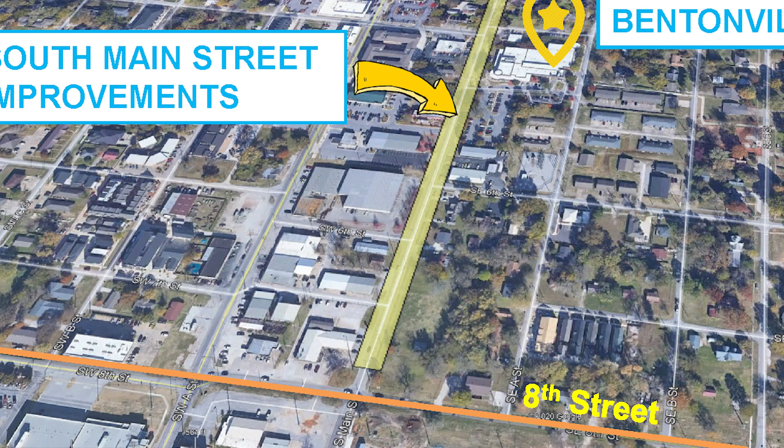The City of Bentonville proposes to make improvements to South Main Street. It's essentially a streetscape type improvement, approximately half a mile, between 2nd Street to the north and 8th Street to the south. 2nd Street, where we end, is just about a block south of Bentonville Square, and we'll be doing improvements within that intersection. As we approach 8th Street at the south end, the shaded area stops slightly short, because 8th Street is proposed to be widened on a future separate project, and that connection will be made with that project.

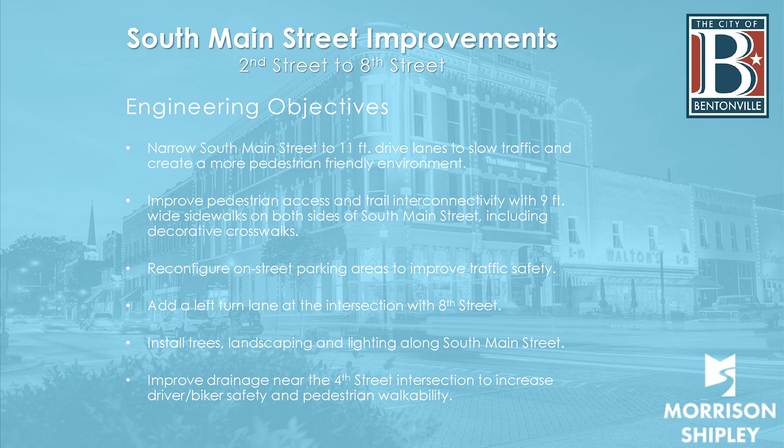As with any project, the city has objectives and goals, including narrowing South Main Street to 11-foot drive lanes to slow traffic and create a more pedestrian-friendly environment. Today the drive lanes are approximately 14 feet wide, and by reducing that, we're hopeful it will impact driver behavior so they naturally slow down and better accommodate pedestrian traffic.

Another goal is to improve pedestrian access and trail interconnectivity by adding 9-foot wide sidewalks on both sides of South Main Street, including decorative crosswalks. We will also reconfigure on-street parking areas to improve traffic safety, and add a left turn lane at the intersection with 8th Street. As I said, we're improving South Main Street but will not go all the way to 8th - that turn lane will occur for the most part on the 8th Street project in the future.

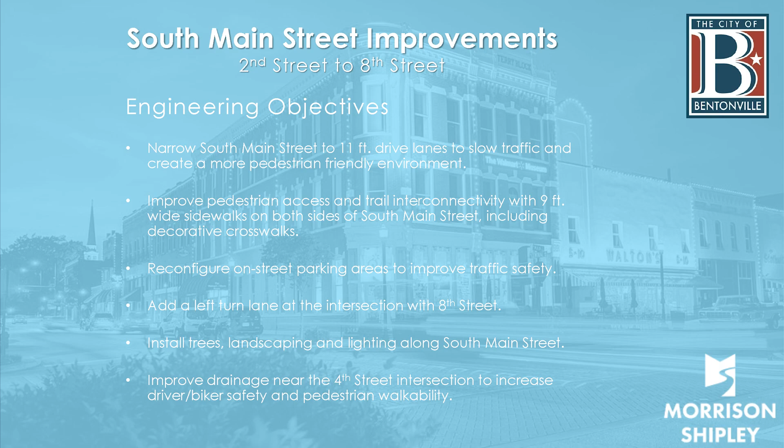We will also be installing trees, landscaping, and lighting along both sides of Main Street. And we'll be improving some drainage issues currently near the intersection with 4th Street, to increase driver safety and bike and pedestrian safety.

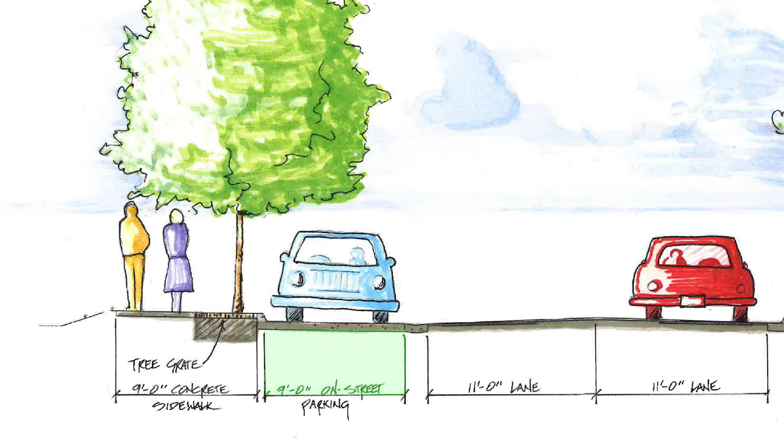Here we have a typical street section proposed for South Main Street. We're proposing 11-foot drive lanes and 9-foot on-street parking, which will be periodic and intermittent on both sides of the street for the length of the project. Also, 9-foot concrete sidewalks on both sides, and we'll be lining the street on both sides with trees and lamp poles.

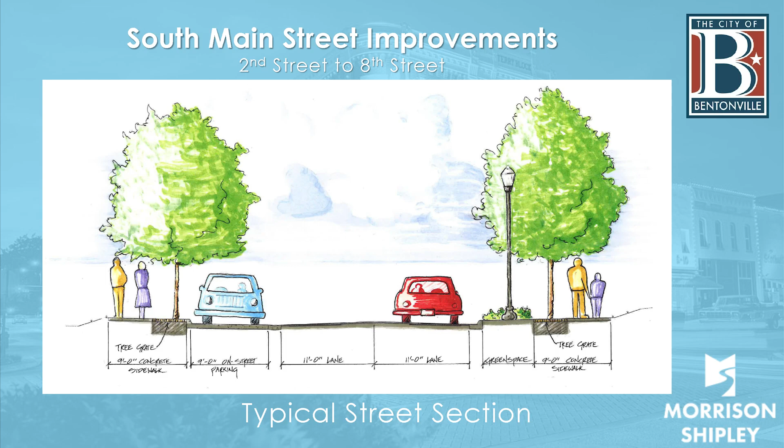Here we have a typical plan view, or overhead view. South Main Street is a 2-lane street, and we'll be replacing the curb and gutter all the way. In some places we have on-street parking where you can see cars parked on either side. We will have a 9-foot sidewalk on both sides, and decorative crosswalks, as you can see here.

In this condition right here, that's actually an existing Bentonville trail, which we'll be accommodating. There will also be trees on both sides of the street, lining both sides.

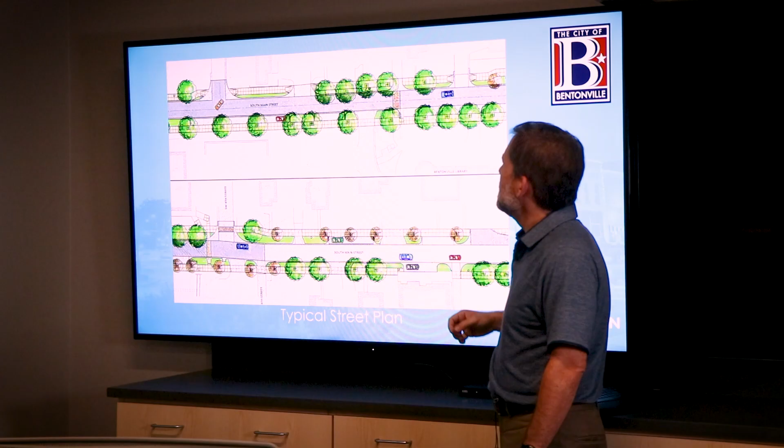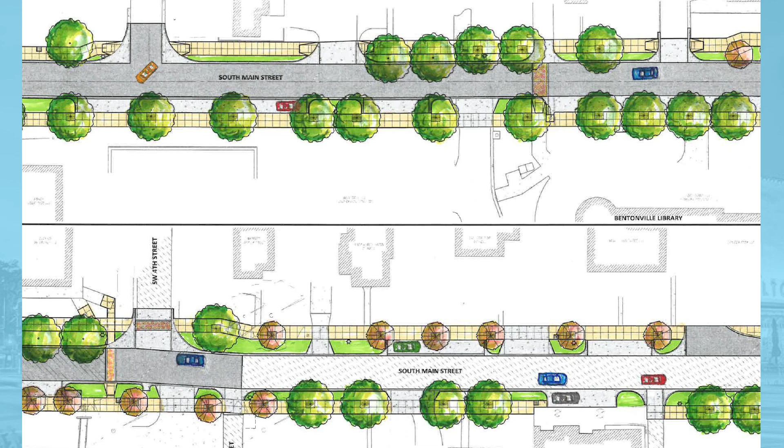You'll notice on the top half where the street is shaded more gray, and the bottom half where the shading stops - from 8th Street to 4th Street, we'll be overlaying with a new asphalt overlay for South Main Street. Everything north of 4th Street will remain as is because that was recently overlaid.

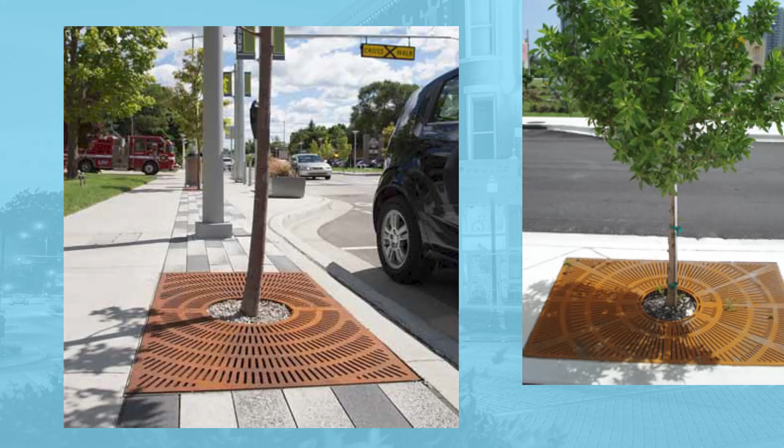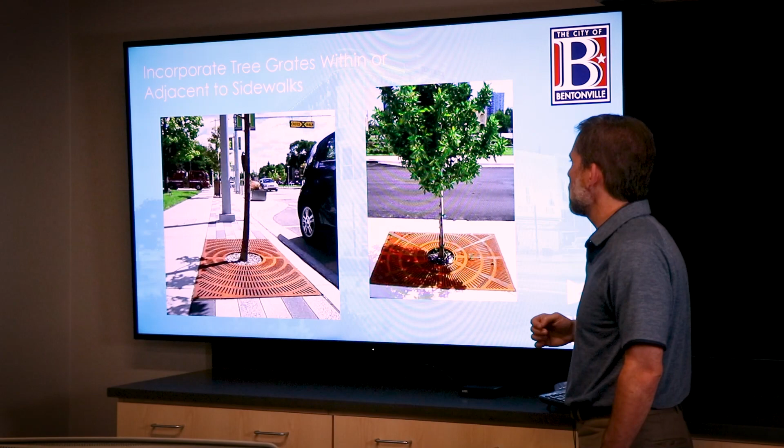Here's an example of some tree grates that we will be setting in the sidewalks for the trees - they will all be in the sidewalks. These grates are a fair representation of what will be implemented for the Bentonville South Main Street project. The purpose of the tree grates is primarily to add or increase pedestrian access on the sidewalk, allowing pedestrian traffic to flow over the tree zone without damaging it. It also provides sufficient space for the tree to grow, and as a secondary positive, it will limit debris or litter buildup around the tree zone.

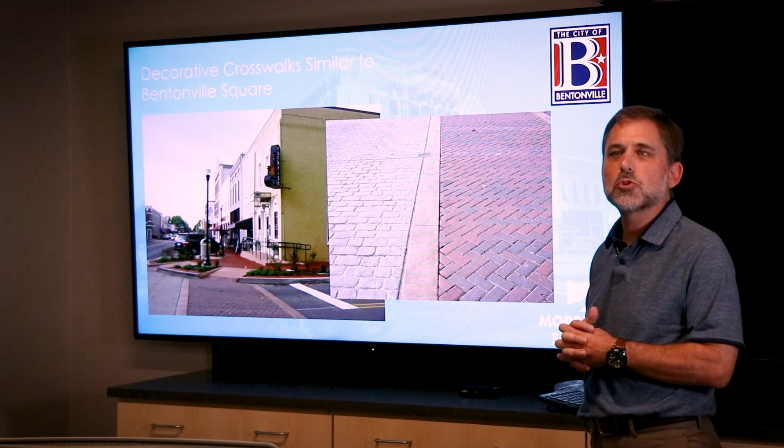This is a picture of a crosswalk at Bentonville Square, a good representation of the type of decorative crosswalks we'll be installing for the South Main Street project. I believe this looks like a brick paver, but I think this project will be stamped concrete instead - a very similar look, and a fair representation of what will happen on South Main Street for all the crosswalks.

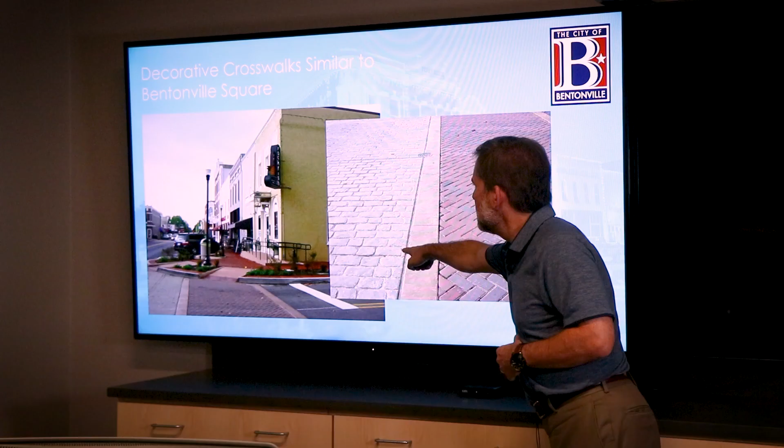The gray area, cut off in the far left corner, is within the intersection itself, and that is also proposed for our 2nd Street intersection - stamped concrete in the entire intersection with crosswalks all the way around.

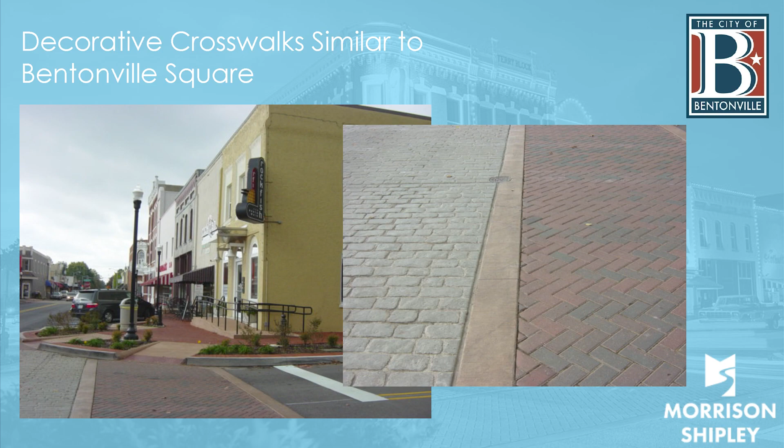These photos represent a goal of the city to create a 'living room' effect, by providing benches, trash receptacles, street lamps, and tree planters. South Main Street assists in serving various city-sponsored events like the Christmas parade each year, and it's always the goal to create an inviting environment, enhancing that experience for our citizens and pedestrians in general.

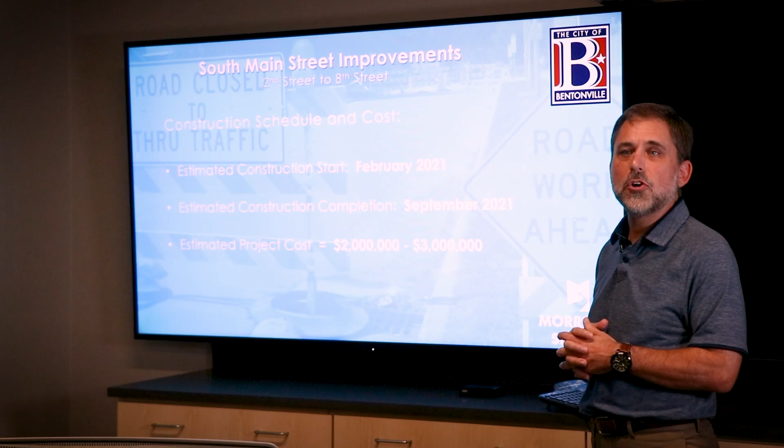Our construction schedule for the project is estimated to start in early 2021, around February, and we believe it'll be a 6 to 8 month duration, ending sometime late summer or early fall, around September of 2021. The estimated project cost ranges between $2 million and $3 million.